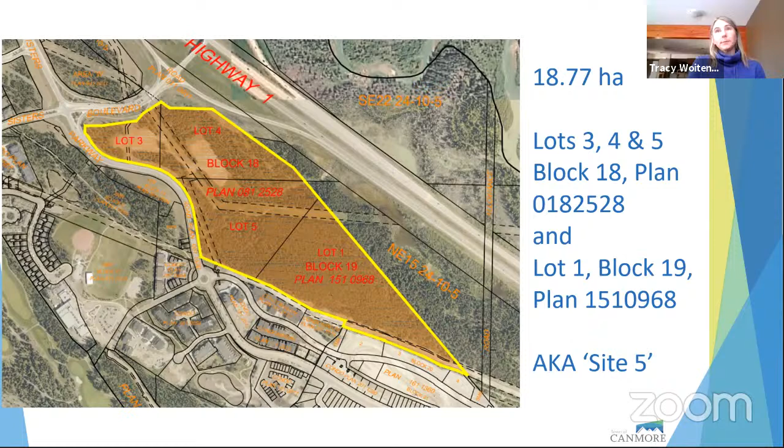So the subdivision proposal is to create 12 commercial lots, 1 medium density residential lot, which is a block for future subdivision, 2 environmental reserve lots, 3 municipal reserves, and 2 public utility lots. It also creates 1 road. Therefore, under our subdivision bylaw, it must be decided upon by the primary subdivision authority, which is yourselves. This image shows the subdivision concept: the overall layout of the various lots, potential building locations, the stormwater pond, municipal reserve, and the residential lot. But this is just a concept map.

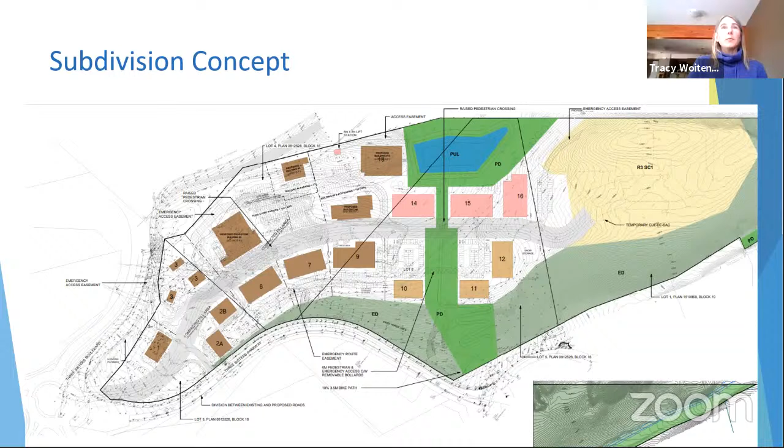The actual tentative plan of subdivision that has been put forward is shown here. This is a little more complex to read, just the black and white lines. But I'm going to get my highlighter going. There we go. So you can see Three Sisters Boulevard here, the existing Three Sisters Parkway here, and this is the new proposed road, the 12 commercial lots, and the residential lot.

So the administration recommendation today is that the application be approved, subject to numerous conditions. You'll see later we have 42 proposed conditions. These address issues that we feel were not resolved satisfactorily by the applicant during our application review and subdivision process, and this allows the recommendation to come forward for approval. It provides clarity of the requirements for the applicant, and provides the town with adequate protections during the detailed design and development processes.

So there's a number of things that the subdivision authority is required to use in making its decision under both the Municipal Government Act and the Subdivision and Development Regulation. The first one is topography. You can see here, this is the site. It is a very treed site. There is some existing development on the site, mostly removal of trees, as well as some stockpiling of the soils. There is a current development permit for stockpile management.

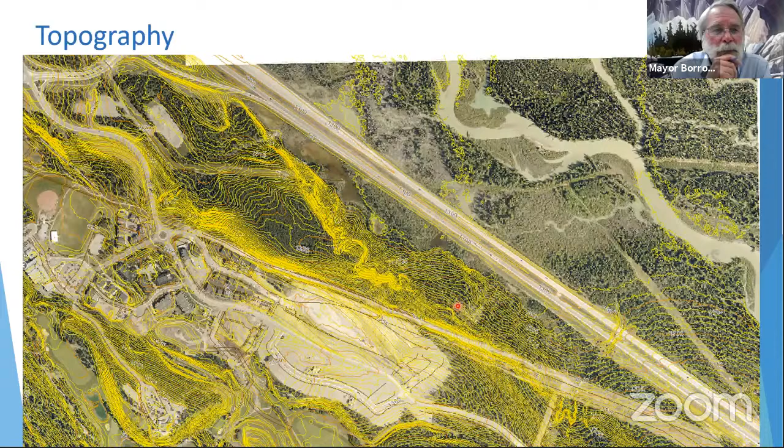Sorry, can I interrupt? Yes. There was a slide that just flashed by. Could you go back to that for a second? This is the previous slide, topography, with all the contours. Yeah, we don't see that right now. Oh, okay. The slide I see is soils. Yes. So these slides are large. So there was that one. I think, yeah. Great, thank you. Okay, my apologies. It might be skipping around because it is so large. I apologize.

So the next consideration was soils. And there's a number of recommendations in the 2 reports for site development that are to be considered for the detailed design of the subdivision and in infrastructure design. And these things are such as grading, fills, foundations, and retaining walls. And there's a condition in the Schedule A which reflects using these recommendations in the design.

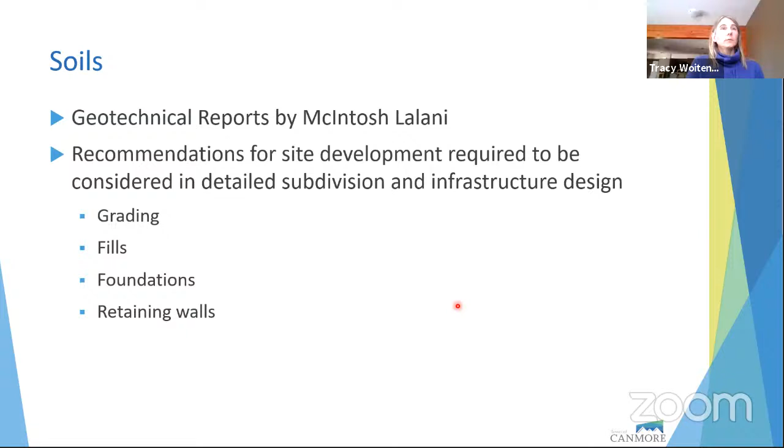The next item to consider is stormwater collection. Do you see the stormwater slide? Has it come up yet? Just the words. Is there a visual? No, just the words. Yeah, we see that.

Okay, great, thank you. So there was a staged master drainage plan, which was prepared by Stantec. This is also in your attachments. So the proposal is that stormwater is collected on sites, and then it's discharged into a collection system. And then the final destination would be a stormwater pond. Then after the stormwater pond, it is released into the Alberta Transportation right-of-way.

Through the design review, administration is recommending that the design is required to be modified so that there are no private storm mains, and that the design accommodates stormwater to be collected on the sites and then directed immediately into the public system, rather than the private storm mains collecting through individual lots. They traverse through lots before hitting the private or the public system.

We also require there to be a clear recommendation for the storm pond design. We did receive a number of recommendations, but there was not one chosen in the design. Through the detailed design, we need to know what the clear recommendation is.

And I will discuss this a little bit later too, but one of the requirements we have made for municipal reserve is for a dog park facility. And we have not agreed with the location of the dog park as it is now, but there are potentially better slopes to be used inside the storm pond for the dog park, but it must be shown to be adequate for both a stormwater management pond as well as the dog park.

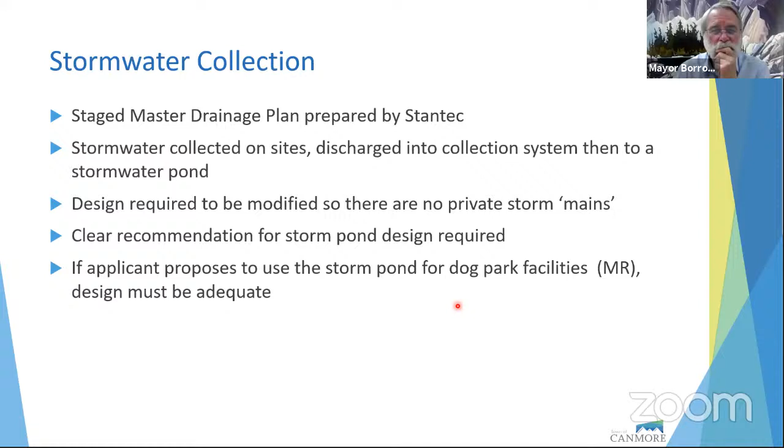The next consideration is flooding, and there is no valley bottom flood hazard. The geotechnical report did not identify any groundwater concerns. However, steep creeks is a consideration here, and this lot is located at the toe of the Three Sisters Creek Steep Creek Hazard Zone. And so we have a condition of subdivision that the grading takes into consideration any steep creek hazard or risk mitigation.

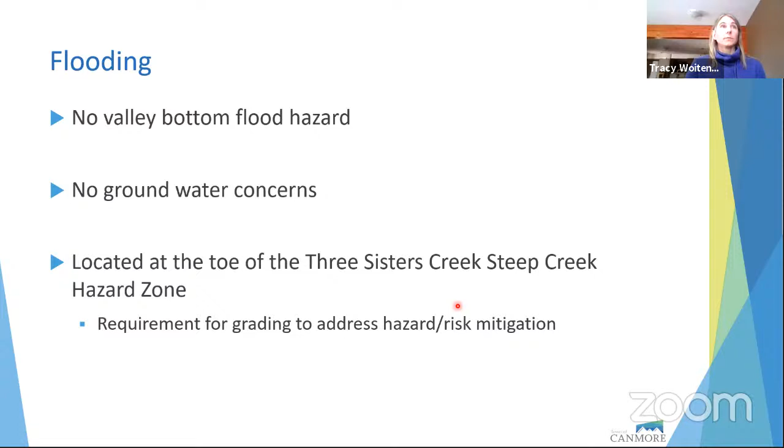Concern of this area, we did get 2 mining impact reports and certificates submitted. These are also in the attachments. And so the undermining concerns that we see, there's 2 reports. One is on the site itself. And so mitigations are required for both road and utility installation within the site during the subdivision process servicing. They also recommend that at later stages, certain buildings will require additional mitigation. And so that would come forward at the development permit stage.

The second report, which deals with the roundabout, identifies quite a large area of the road which would require paste backfill for this roundabout construction.

Can I just ask a question about the roundabout? Is that something that the province would have a review on as well, the paste backfill for the roundabout, or not? Yes, so under the Canmore undermining review regulation, the province takes all responsibility for the review of designs and mitigations at subdivision. So they would sign off on this proposed mitigation? That's correct. Okay.

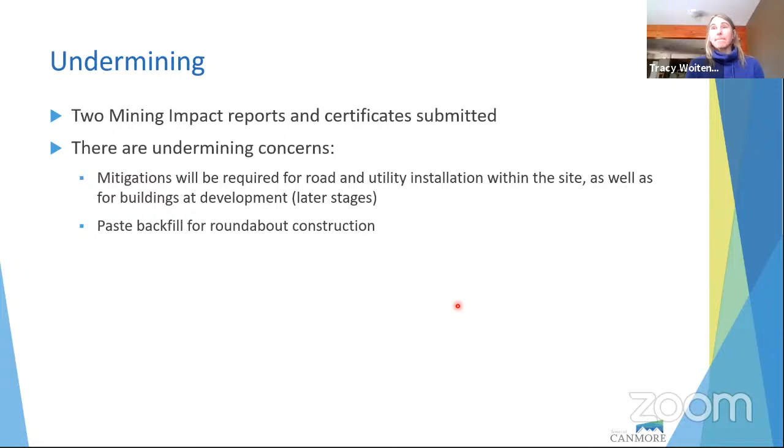Erosion is a concern on this site, and the geotechnical reports did do some slope stability analysis, and it did recommend development setbacks from the steep slopes and mitigation, such as retaining walls. Also required that restrictive covenants are registered on certain titles to maintain development setbacks and to limit further disturbance of the slopes.

Administration is also recommending that a 0.5 hectare portion of lot 18 MR be dedicated ER. This is a very steep slope. The remainder of the slope was designated ER. The slope was identified as unstable and mitigations to be done at the bottom of the slope for those developments, as well as that restrictive covenant. So we do know that from the existing geotechnical reports, we have that slope is unstable.

The one thing that the geotechnical reports did not evaluate was in the area of lot 16 MR. And I will get into that a little bit later, but it did not address the stability there or any mitigations for the existing erosion that's occurring on that site.

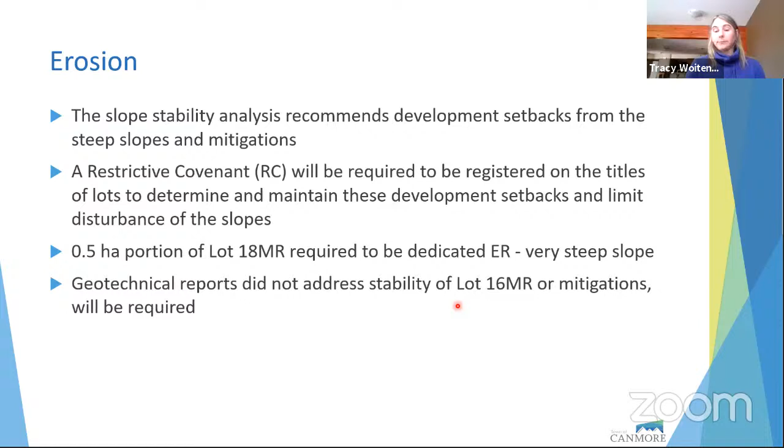We are also required at subdivision to make sure that any proposed lots have accessibility to a road. And designing access to this site was very challenging for a number of reasons. There's steep slopes, there's Alberta Transportation restrictions, as well as emergency access to the site. And so through conversations with the applicant, two unique solutions were proposed. The first one is a 5-leg turbo roundabout. And the second solution is the principal commercial street design to function as 2 public accesses. And this would be for emergency purposes.

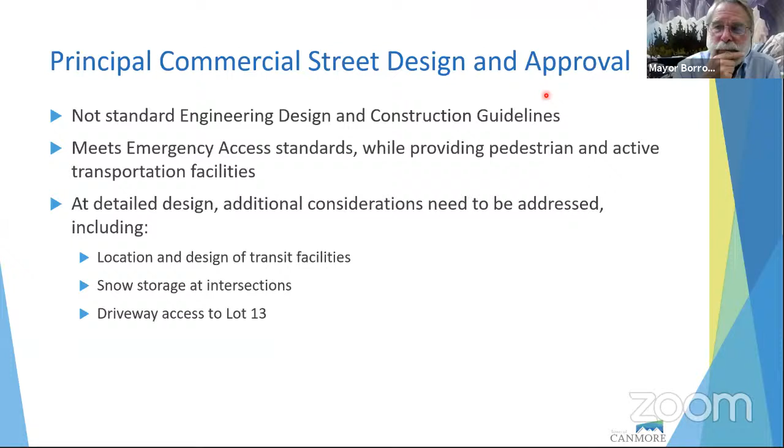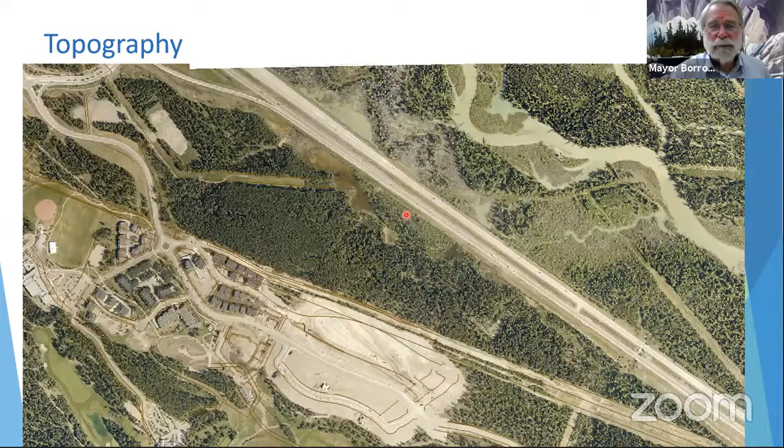Lot 13 is the, let's see if I can get back. Do you see the tentative plan of subdivision right now? No, not right now. Okay, it should catch up with me in a second here. Yeah, I see topography. It gets stuck on that photo. It's a large one. Okay, there we are in tentative plan. Yep. This is lot 13 here. Okay, thank you.

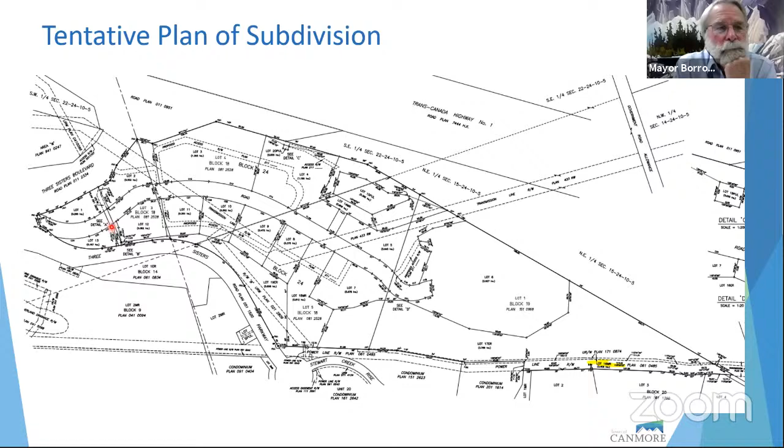The other consideration with the water system is there is a greater water looping with the larger system, and we would like to further explore this at detailed design to minimize disturbance to the steep slopes. The current location of the water line is in that proposed municipal reserve lot. We would like the applicant to also explore putting the water line under the pathway, the redesigned pathway that we are proposing or recommending.

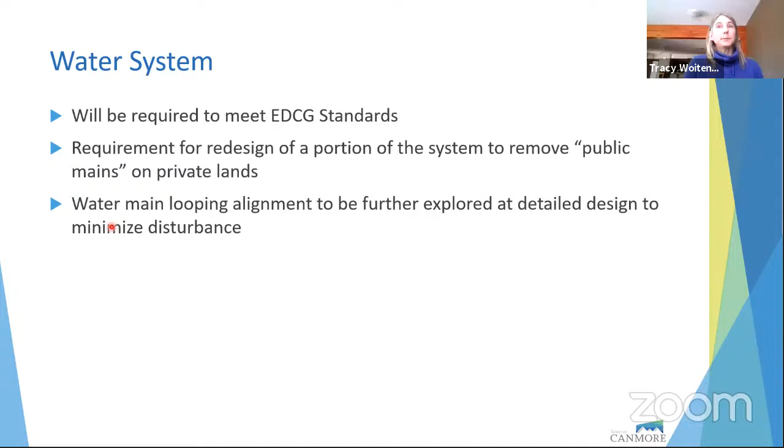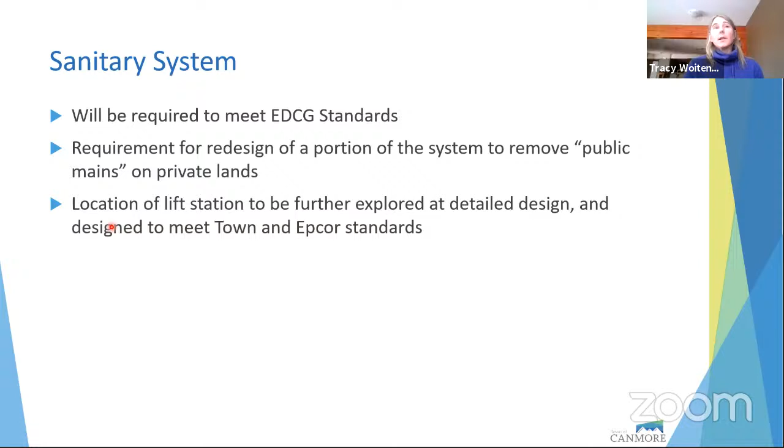Similar to the water system, the sanitary system also must meet our standards. Again, there have been some portions of the system which have been proposed to be public, but they are on private lands, and we would need that to be redesigned. Mostly that is related to the location of the lift station. And so we have a condition of approval that we would like to further explore in the detailed design the location of the lift station, as well as we'll need the design to meet town and EPCOR standards.

That's the technical considerations. There's a bunch of other considerations that the subdivision authority needs to look at when approving a subdivision, and that's consistency with our statutory plans. And so generally the subdivision is consistent with the plans. With the land use bylaw, it generally conforms, but administration recommends minor amendments to the land use bylaw, and this includes the land use district mapping.

So for example, some of the lot realignments or changes in municipal reserve and environmental reserve require changes in zoning. As well, the new commercial street design is different than what was anticipated when this land use district was created. Currently it is a 0 yard setback for the front yards, and we are recommending a minimum of 0.5 meters to 1 meter. And that would be in the TS-GD district.

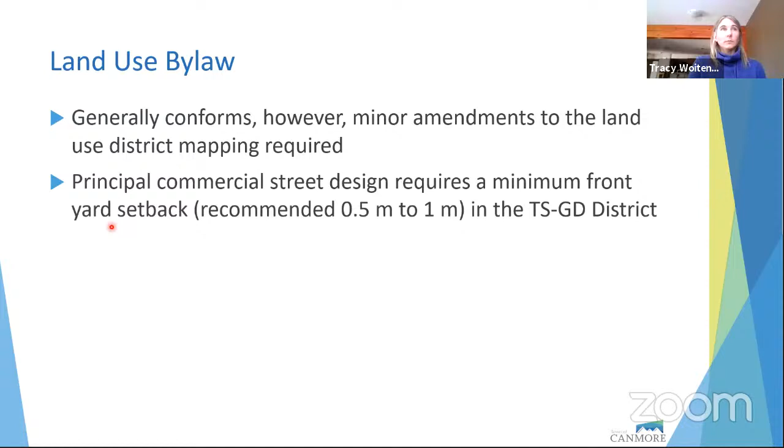The next consideration is municipal reserve contribution. The MGA allows a municipality to require 10% of developable land for municipal reserve. Developable land includes the total area of land minus any ER dedication. We can't take municipal reserve on environmental reserve, and there's quite a large area of land proposed to be environmental reserve. And so we've evaluated the municipal reserve proposal by the applicant in accordance with our various policies, including the MDP, our open spaces development guidelines, and the open spaces and trails plan.

And we are not in agreement with the lands that are proposed by the applicant for municipal reserve. Reason for this is that most of the lands proposed are very steep. And so they have greater than 33% grade, almost all of the municipal reserve. And so our administrative recommendation is to only accept different MR lands than has been proposed by the applicant.

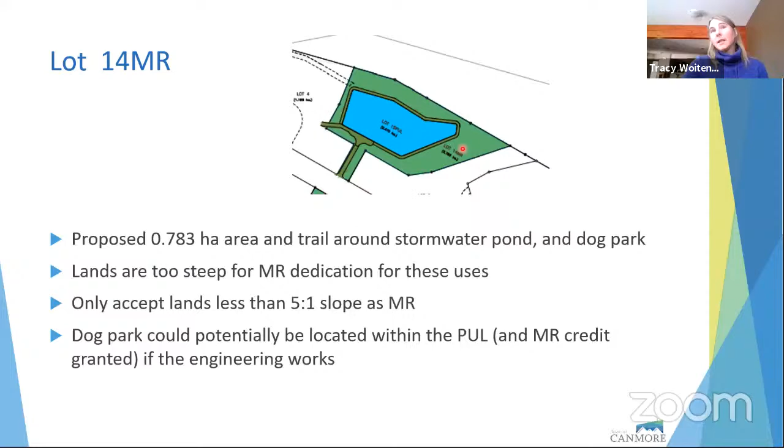So this is an overlay that staff created to show this is the landscaping plan and the grading plan that have been overlaid on top of each other. So for example, this dog park here, these slopes are 33 to 35%.

Oh, sorry, that just popped up now. Okay, thank you for letting me know. This is the dog park here. Can you move your cursor again?

Okay, yeah. Thank you. This dog park, these lands are 33 to, I think, over 35% slope, which is too steep for a dog park. As you can see, the remainder of the lands as well proposed for MR are also at a minimum of 33%. So we have proposed a stormwater management pond. These inside slopes are less, they are 5-to-1. If the dog park could be accommodated within these less steep slopes, if that works for the engineering design, as well as accommodating a dog park use, we would potentially give some credit for municipal reserve in the PUL lands.

And if it went that way, it's hard to visualize, you know, in the real world, what that dog park would look like if it was where your cursor is now. I mean, is it wide? Does it compare to one of the neighborhood off-leash dog parks, for instance, that we built? It would meet our requirements. So we have asked the applicant to provide a 0.4 hectare dog park, which is our smallest size of a dog park that we have. And so it would be comparable in size.

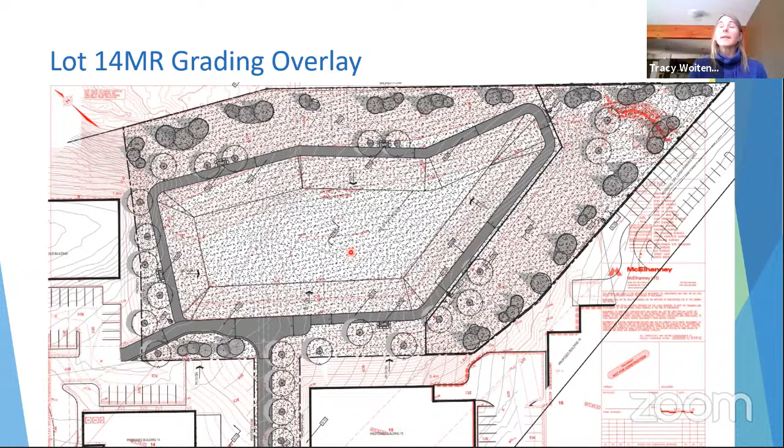If the dog park fence, for example, were behind the trail. Because this area, the dog park wouldn't be designed as a regional dog park, there's no parking here. We wouldn't anticipate people to be driving from other communities. This would be people walking from either the residential area or the commercial area to walk their dogs. So it would be a smaller one. Yeah, thank you.

The second MR proposed is lot 16, and this is the linear trail. So this trail is already existing. It was constructed, I think, with Stewart Creek Phase 3, and they proposed 0.406 hectares in this. However, administration notes that these lands are steeply sloping above and below the trail. The slopes below the trail are eroding and are potentially unstable. These slopes were not assessed in the geotechnical reports that were provided.

And so our conditions of approval is for a recommendation for evaluation by a geotechnical engineer. And so any mitigations to stabilize the slope must be undertaken, as well as potential realignment of that municipal reserve or environmental reserve boundary to accommodate any of those unstable slopes.

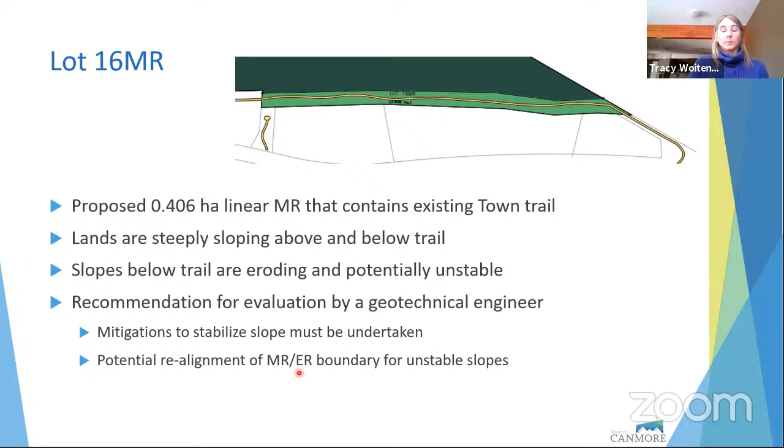The last MR proposed was lot 18 MR. And as I mentioned earlier, this contains some of those steep unstable lands. And so administration is recommending that this area, which is 0.5 hectare, be included in the ER dedication. So you'll notice that this land here is ER, as well as this ER. So this is that same steep slope. Actually, a lot of the land in here is almost steeper than the other environmental reserve lands.

And so administration recommends that the remaining 0.32 hectares of land may be accepted for appropriate park uses. They did include a residential playground in this area. Administration's recommendation throughout the review process, to meet our policy set for playgrounds, is that a playground isn't located in the commercial area, that it's actually located in the residential lot.

And so we have come up with a list of required MR to be designated as part of this application approval. That would be that in lot 6, there's a deferred reserve caveat registered on the title, and that would accommodate a future sub-neighborhood playground. And that would be 0.2 hectares. And this is in accordance with town policy.

We would accept lot 14 MR for the pond trail, because it is flat and it is a trail, and any other areas which are usable for MR purposes, including any slopes less than 5:1. So approximately by calculation, that's about 0.196 hectares. If the dog park could be included in this area, and the engineering works out, it might go up to 0.32 hectares.

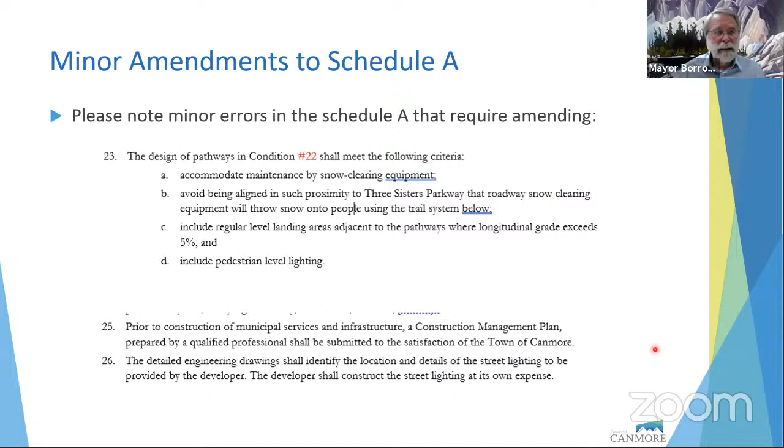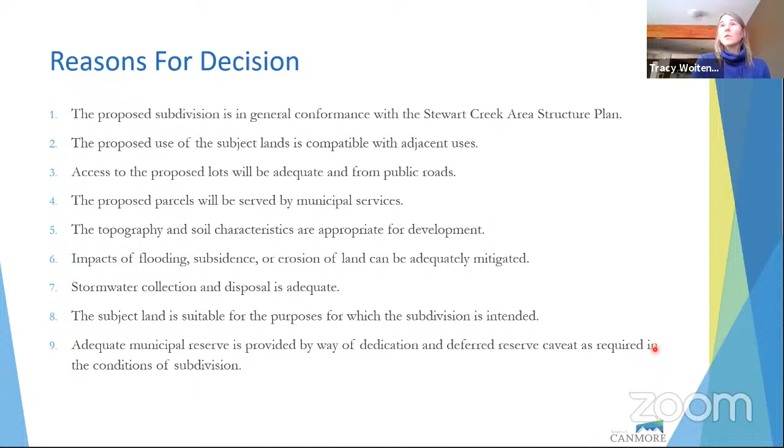And there are a number of reasons for our decision that we have offered to the subdivision authority. So you could also amend the reasons for these decisions should you feel it necessary. That's the end of my presentation. Any questions? I have a few. So I'm just going to start at the beginning, and the other two members of the authority can jump in at any time, of course. Looking at item C, stormwater collection and disposal.

The second paragraph: stormwater runoff from each site will be collected and treated by private means prior to discharge to the public storm main. So I'm just curious how the runoff is treated. What's that process? Brian, may I please ask you to respond to that question? Thank you. I'd be happy to answer that question.

So first and foremost, I should mention that there is a large oil grit separator proposed immediately upstream of the stormwater management pond. So the primary function of removing sediment, hydrocarbons and metals from stormwater will be accomplished by that oil grit separator, which will be owned and maintained by the town. Sorry, you're a little garbled. What are you calling that? It's called an oil and grit separator.

Essentially, it's a large catch basin, if you will, that moves the stormwater through a weir system and slow moving water. It's able to separate out hydrocarbons and dirt and debris. It's something that's used widely throughout Canmore and in all municipalities in Canada. So there will be a rather large one just by the stormwater management pond that will be owned and maintained by the town. But in addition to that, each and every site will provide some level of stormwater quality treatment before they discharge to the town system.

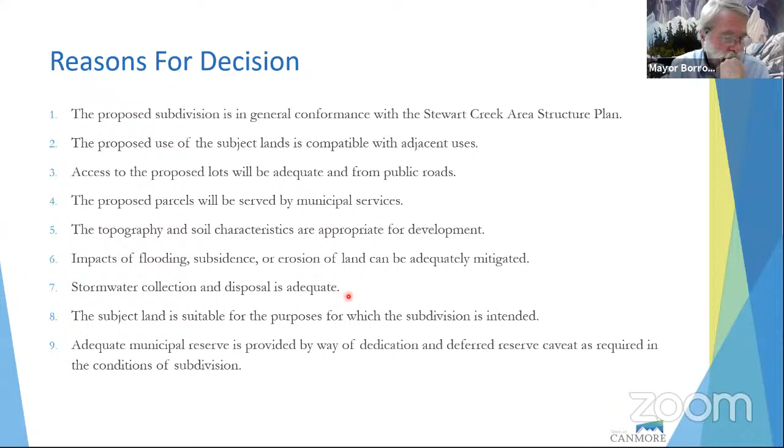is it possible for you to put the diagram of the roundabout back up? Anyone? I know there's several. I flipped there. It might just take a moment for it to come up. Sure. The one I was looking at was page 259 of the full package, but can you zoom in on that at all? On the roundabout part? Just trying to imagine myself. I don't think I can zoom in on this presentation.

So this will do. So if I'm driving into town off the Trans-Canada, then I have a clear option to turn right going towards town on the Parkway. If I want to go around to the other leg of the Parkway, I would come onto the roundabout and would I stay in the outside lane or get into the inside lane and then go back to the outside lane? How do these turbo roundabouts work in that sense?

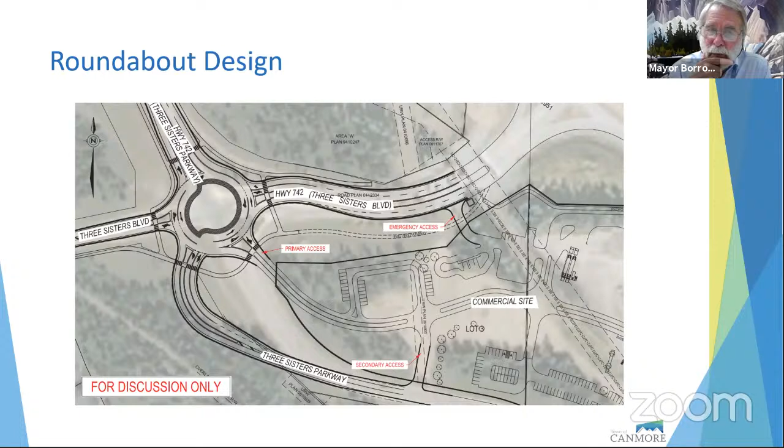I had a question in the written report that I think you covered for me, but I'll bring it up in any case. So page 12 of your report, you're talking about trails and pedestrian connections, and your recommendation is the pathway that was shown in yellow and the one in orange not be constructed. If I understand what you were saying, it's really because of the steepness of the land. Is that really the primary factor?

There is a number of considerations, but yes, the steepness of the grades. Claire can speak more to our evaluation of the proposed grades, for example, of the yellow pathway. And a bunch of that comes down to operations and maintenance concerns. So Jordy is not here today, but Claire can maybe speak to the operational concern. Claire? Yeah, that'd be great. Thank you.

Just unmuting here. Yeah, grading was certainly a significant factor in terms of looking at the yellow alignment and the navy blue alignment. So looking at maintaining grades that our operators are able to snow clear in the winter so that we've got year-round access to the site, and as well trying to keep those grades as low as possible so that it's accessible and usable by people as well. Fewer switchbacks on the blue alignment too, and it ties in well to the central part of the spine road and uses some of the existing alignment that's had trees removed already. Great, thank you.

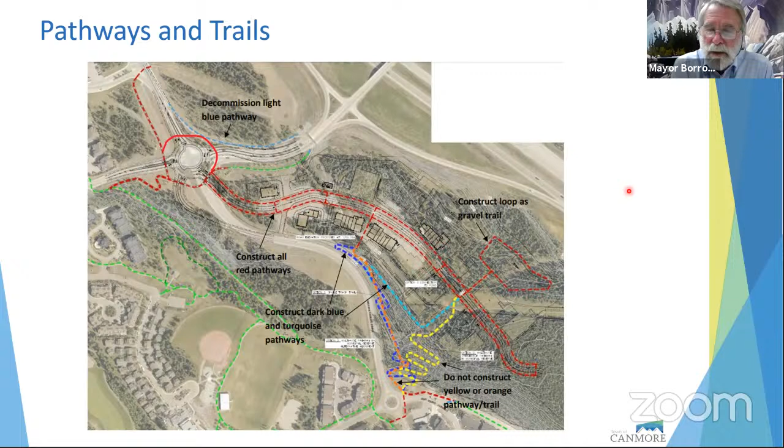Moving on to the Schedule A. So looking at the fourth condition in Schedule A, prior to submitting detailed design, the developer shall prepare and have approved a transportation impact assessment, et cetera, et cetera. So how is that different from the TIA that is shown in attachment 11? Tracy, can you respond to that, please?

Thank you. Yes, and sorry, attachment 11 is the site-specific TIA. So this would require some modifications to some of the assumptions around land use that were used as inputs for that TIA, but generally it will cover the same area. It's an update really to the background volumes that are assumed along the Three Sisters Parkway for vehicle trips. So is it something that just puts finer detail on the TIA that was included as part of the application? It just brings it into line with the currently approved land uses in the surrounding areas. So it would be the same level of detail as the TIA, but just a change to the inputs in what was submitted. Okay, thank you.

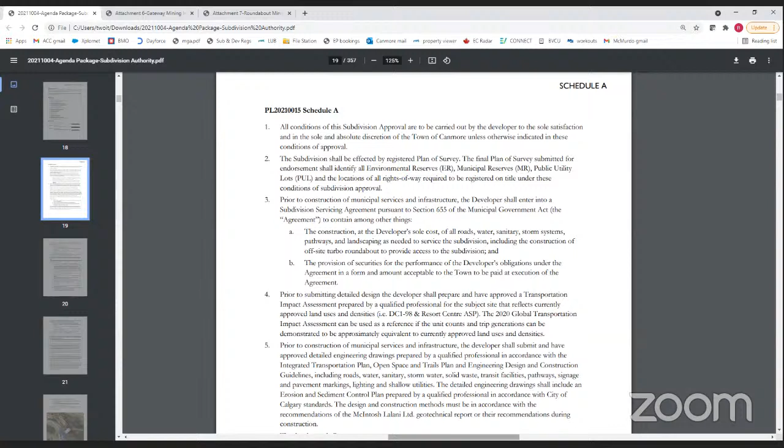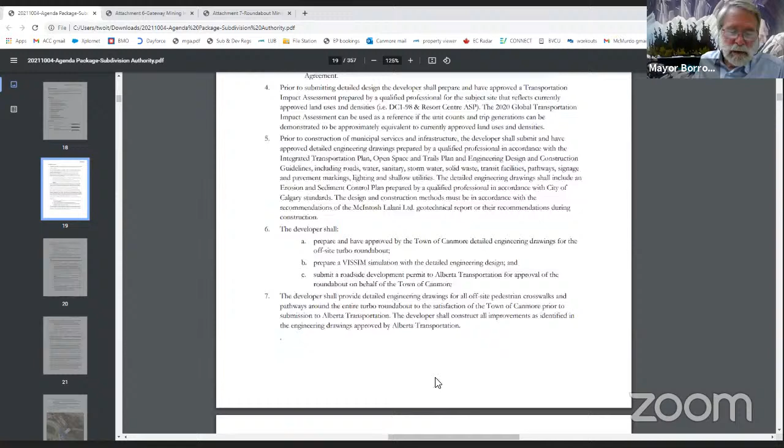In condition number 10B, notice the number of driveways onto the principal commercial street must be minimized to reduce conflict points. And what's the standard that would be applied to that?

Our EDCG provides some guidance in terms of access design. Columbola Drive is a collector roadway, and we've also identified active transportation facilities along both sides of the road to support high volumes of people walking and cycling. So speaking at a general level, it would be to try and reduce the number of conflict points where you have vehicles entering and exiting and crossing pathways.

So at this stage at subdivision, if there are opportunities for some of those to be consolidated between adjacent sites or not to provide multiple accesses where they're not required, that would be the intent of that requirement. Just as it sounded. Thank you.

And in 10D, it references a swept path analysis shall be provided. What's a swept path analysis? That would be to look at the design specifics of the roadway. So most of the vehicles that travel along the roadway are going to be passenger vehicles that don't require as much space to make turns. And the control vehicle for those roadways and accesses would be larger delivery vehicles coming in there.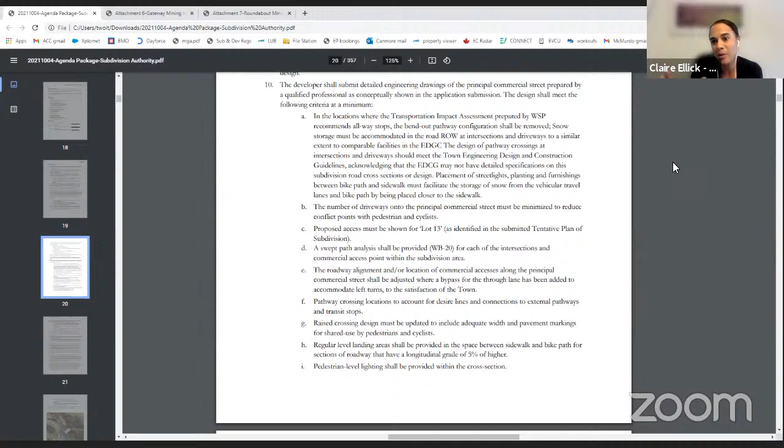So swept path analysis just shows the space that's required for those particular vehicles to make a turn and reflect that they can be accommodated through the proposed geometry. Okay, not what I thought at all. Thanks.

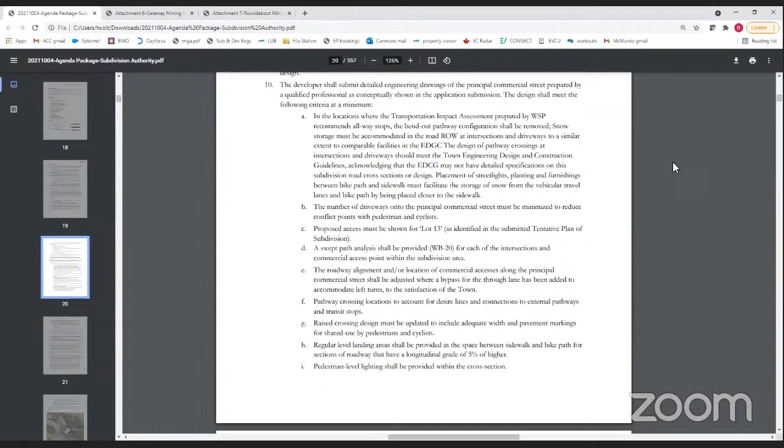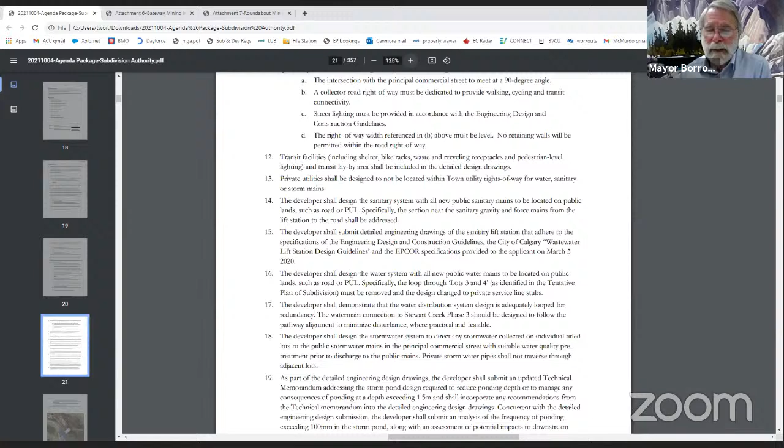There's a number of acronyms within the conditions, many of which are spelled out at one point or another. I was looking at number 14 and PUL. What's that acronym for? A PUL is a public utility lot. It typically contains utilities, underground utilities in it. Great, thank you.

And in condition number 19, it suggests that there'd be required an assessment of potential impacts to downstream water quality should the pond area be proposed for use as a dog park. I think that's pretty straightforward, but is it a concern about uncollected dog feces contaminating water, or is that what that's about? Yes, indeed, it is. We wish to assess the potential impact.

Certainly we would have the Mutt-Mitt dog bag dispensers located strategically around the site, and we would ask dog owners to collect dog feces. However, it is to be expected there would be a small amount that would enter the effluent. So the assessment would just be an assurance that downstream water quality can be ensured with that dog park function. Okay, and is that something we've done with all of the dog parks that we've approved?

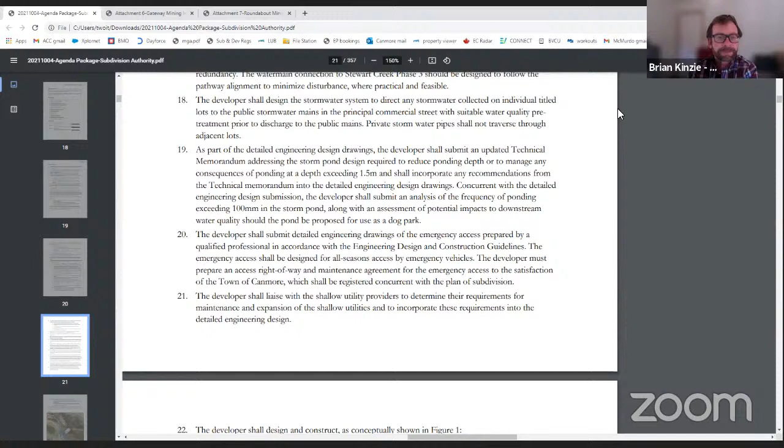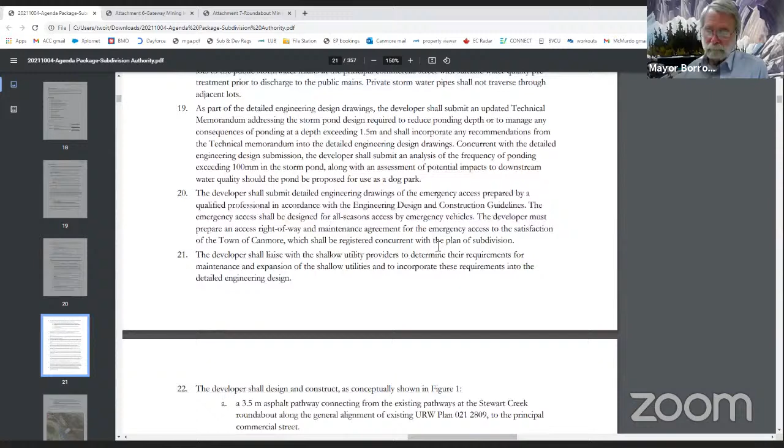And then number 20, it talks about the emergency access point. I assume, is it similar in nature to the emergency access road in Rundleview and Silvertip? Would it be designed to that kind of standard? Brian or Claire, could you please? Thanks, Brian. Sure, I can take that. Yeah, so we're talking about the emergency access that connects out to the Three Sisters Boulevard, I believe, near the interchange. Right, I don't have the map, but yeah, up to the north end of the subdivision.

Yeah, so the town of Canmore, for emergency access, we defer to the City of Calgary Fire Department access standards. So that would require a 6-meter wide paved surface capable of supporting 80,000 pounds. It would be locked off with a swing gate, and in this particular case, we don't have a visual in front of us, but there is a central median that separates the inbound and outbound lanes, and there would very likely be a gate and some changes made to that median as well to allow all turns, egress and access in case of an emergency. Great, thanks very much.

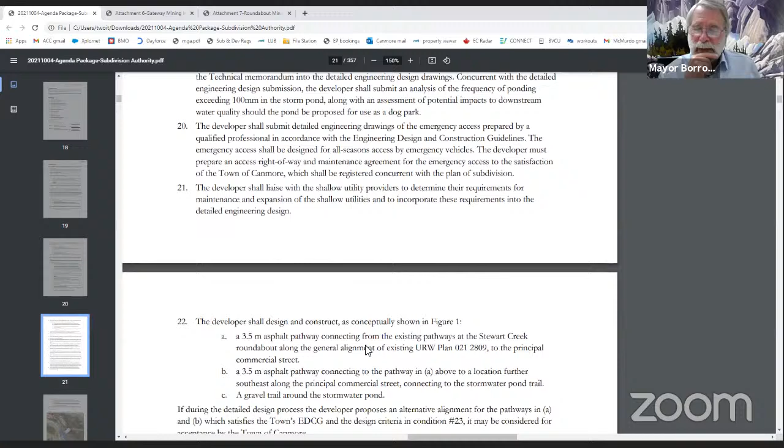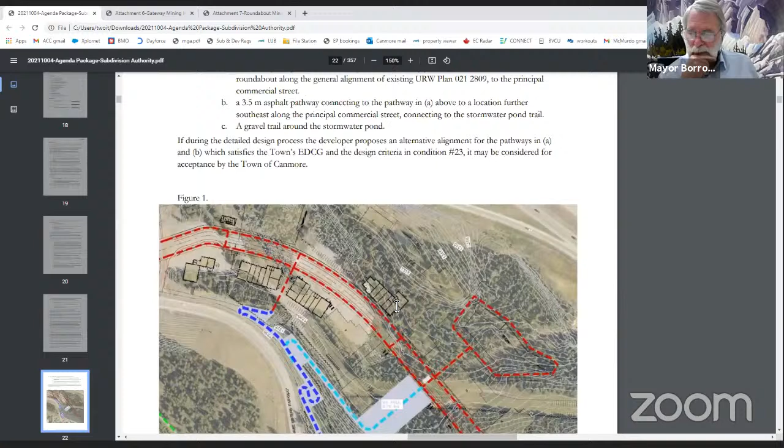So I'm curious, under condition 26, it notes that prior to the endorsement of the plan of survey, developer shall have constructed or paid to have constructed all on-site and off-site municipal services, etc. And I have a couple of questions, one of which is related to the endorsement process itself. I recall we had a discussion not that long ago in regards to Silvertip subdivision, but if Ms. Wojtanko could speak a bit more to the intent of 26 and the impact on endorsement, and also curious about what a realistic timeline might be for all of that work to be done.

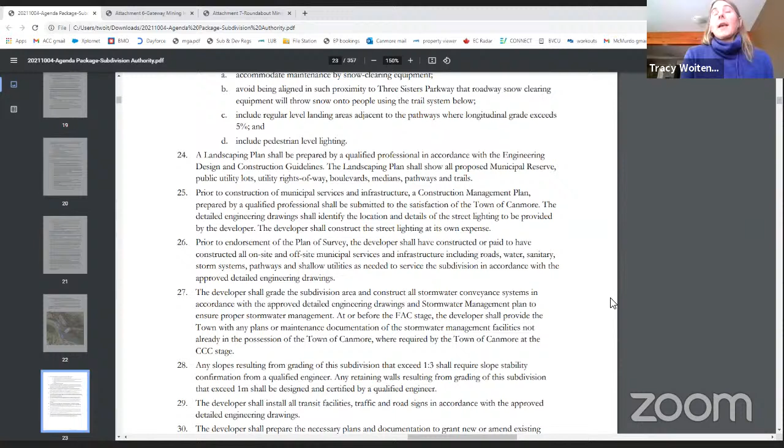So when you endorse a plan of survey, the titles to the lots are created, and then they can be sold. And so it would be the town's responsibility to ensure that those utilities and roads are provided to those lots if the developer defaults on that. So we would need to either have the money in place or to have them constructed.

Our town preference, and we have been discussing this with the applicant, is that the utilities and the road access are constructed prior to endorsement. And this would be negotiated at the signing of the development agreement. And then the remainder of the works for municipal infrastructure would be secured through performance securities at the time of subdivision, at signing of the development agreement. So timing of endorsement really depends on the speed of the applicant in doing the detailed design and commencing construction.

So maybe I'm misremembering, but wasn't there a time limit on getting to the endorsement? There is a time limit under the MGA. So for any subdivision approval, you have 1 year to take an application for endorsement. And if it is not endorsed by that time, council can give an extension to that approval. And that's not to say that endorsement needs to happen within 1 year.

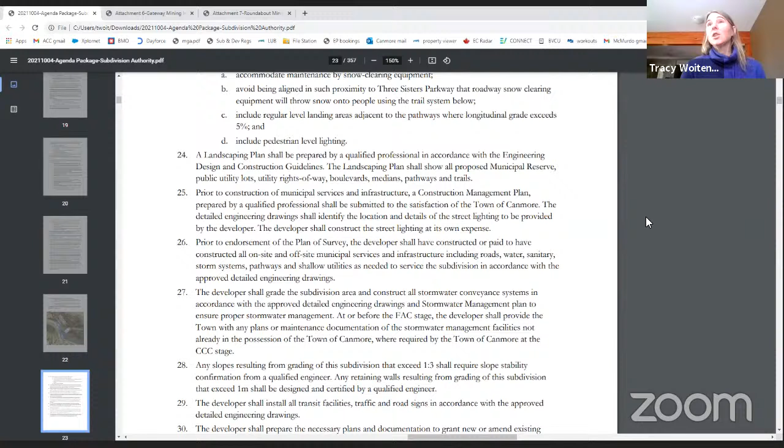That is a typical expiration period for anything within subdivisions, just to ensure that a subdivision approval doesn't go on in perpetuity. Design standards of municipalities change, zoning changes, and so that gives the municipality the ability to not renew a subdivision approval if it's no longer relevant. So it needs to be renewed at kind of annual stages. Okay, so there is that ability for the process to be extended to get the endorsement. That's correct. Thanks.

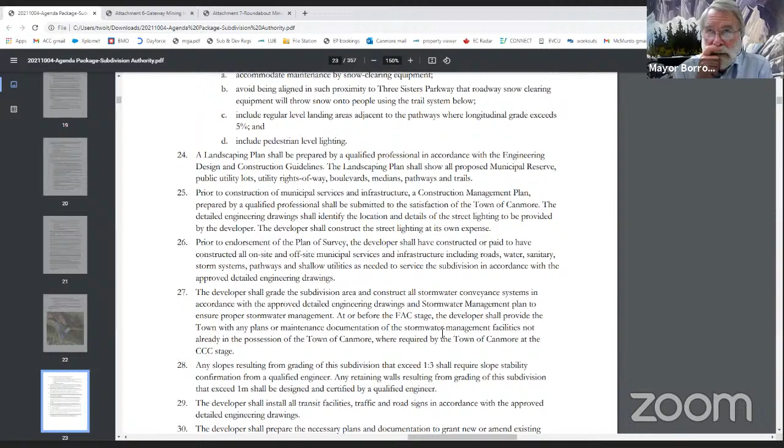And on condition number 27, grading of the subdivision area. So I'm curious what degree of grading we might see in this subdivision, and thinking back to the grading that occurred with Stewart Creek Phase 3, can you just speak to the level of grading that you might anticipate? Ryan, do you mind answering that question for me, please?

Okay. In the drawings submitted by the applicant, the preliminary engineering drawings, is what they call a grading cut fill heat map. So you'll notice, I'm just trying to pull it up now, but there are some significant cuts and fills in the order of 3 meters.

Your sound is kind of breaking up a little bit, at least for me. Apologize for that. My computer's working pretty hard here today.

There are some areas of relatively significant cut in both directions. It is worth noting, as Tracy had mentioned earlier, the town has granted a development permit for management of the existing stockpiles. You may be familiar that there are 2 rather large stockpiles there, and work is ongoing right now in terms of manipulating those so that they can be considered as structural fill. But once that work is done, there will be some other areas of fill and cut as well.

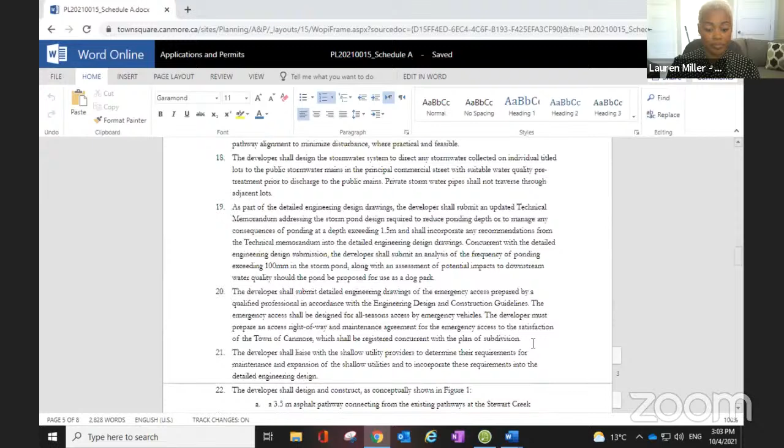So through you, Mr. Chair, just to clarify, Ms. Bravo-Stewart, can you scroll down to the list of attachments? The attachments are in the staff report, not in the Schedule A. So I would just ask for your indulgence. If we refer back to the report, what I would recommend is that the subdivision authority make a motion to amend attachment 2 and reference the updated proposed plan of subdivision that, Ms. Woitenko, you can correct me, was dated April 22nd, 2021. So that would clarify for the record, as well as anyone who's watching, that the one that was originally provided in the package was incorrect.

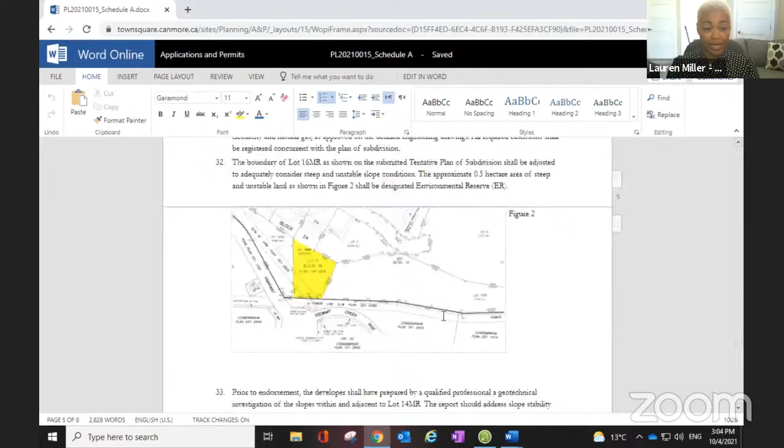A new one is being attached, and the conditions associated with the amended proposed plan of subdivision is what Ms. Bravo Stewart has on the screen. Those numbers will correspond with the amended attachment 2. Does that help? Yes, if you would have that motion prepared and ready to go. Sure. On the overhead at that time or on the share screen. That we can do. I will maybe defer to Ms. Woitenko to walk through the changes in the Schedule A, just so that everyone's clear. Does that work for you, Mr. Chair? Yeah, thank you.

So just looking back at the 3 requests from the applicant, could you address the suggested change for section 26, which is now section 27, I believe? Katy, you have control of the Schedule A, so you'll need to scroll down for me, please. Katy, I don't believe this is the version, maybe I should show it. This doesn't show the track changes that I had just made. Is track changes turned on in your version, Ms. Bravo Stewart? It was, but I can stop sharing my screen. Okay. Ms. Woitenko, if you have those handy, if you can share your screen.

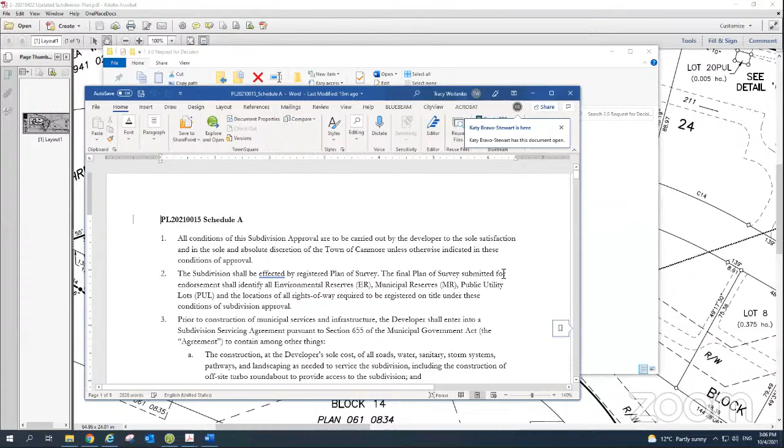Great. Can everybody see this? Yes, we can. Okay, yeah, great.

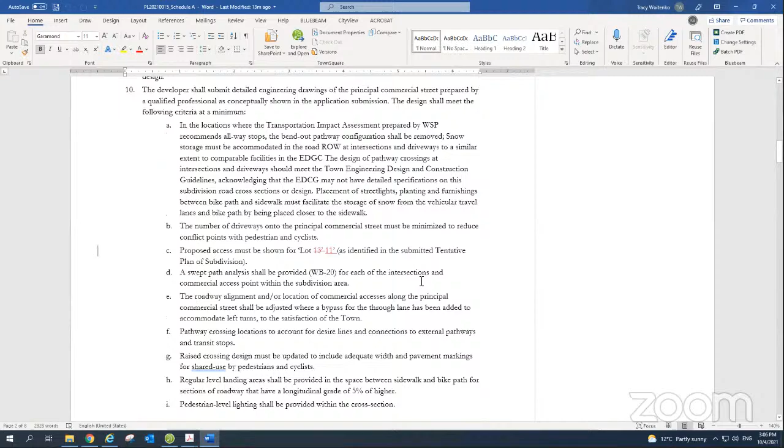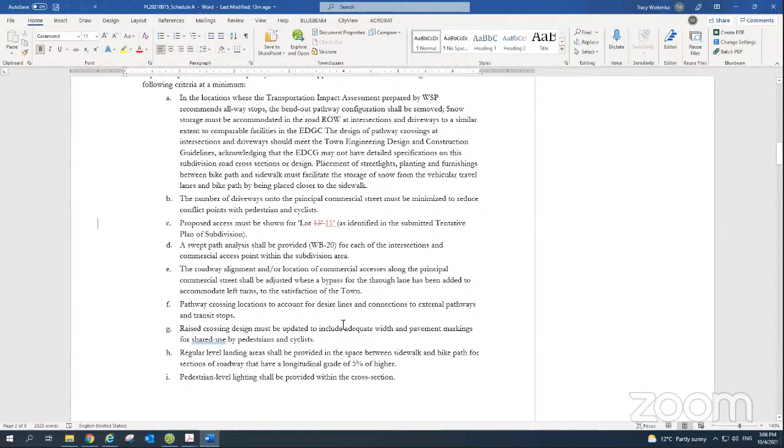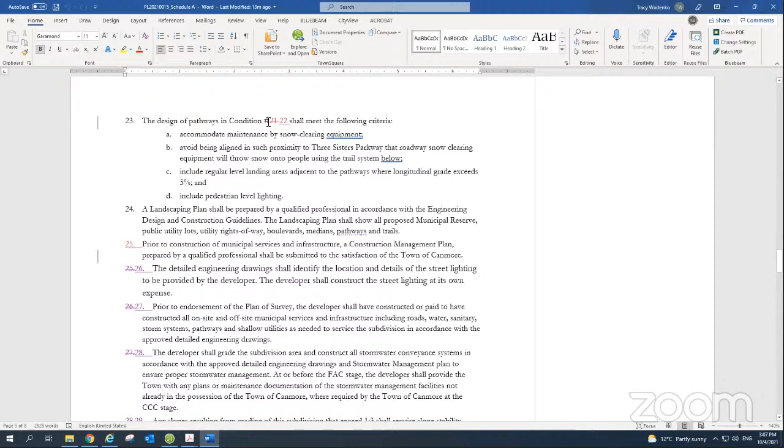So I'll run through the changes from top to bottom. So in 10C, lot 13 should reference lot 11. In number 23, that had changed to condition number 22. And then number 26 is the new number, and then everything is renumbered after that.

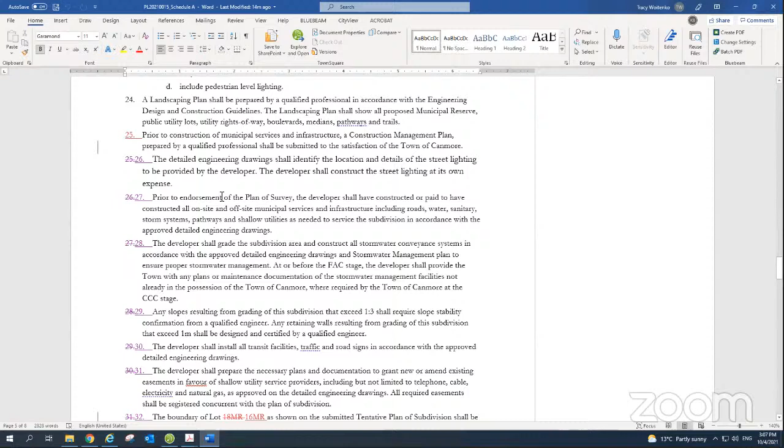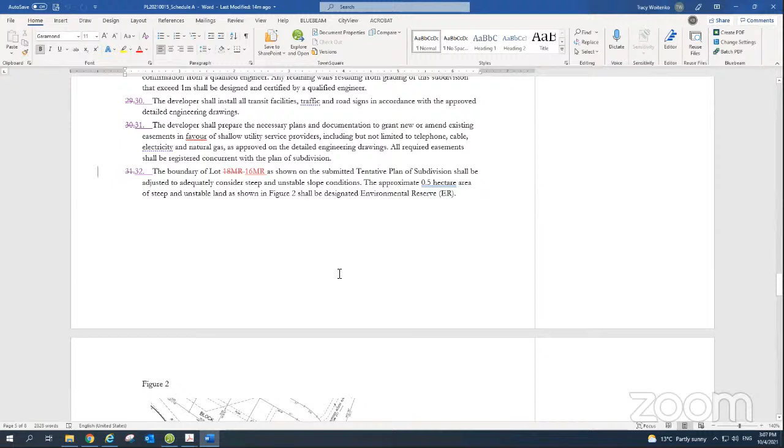So continuing on, administration, just the technical or editorial changes. In number 32, lot 18 MR should be lot 16 MR. And there's a whole bunch here in number 33 and 34. And in 39, it should also say lots 1 through 11.

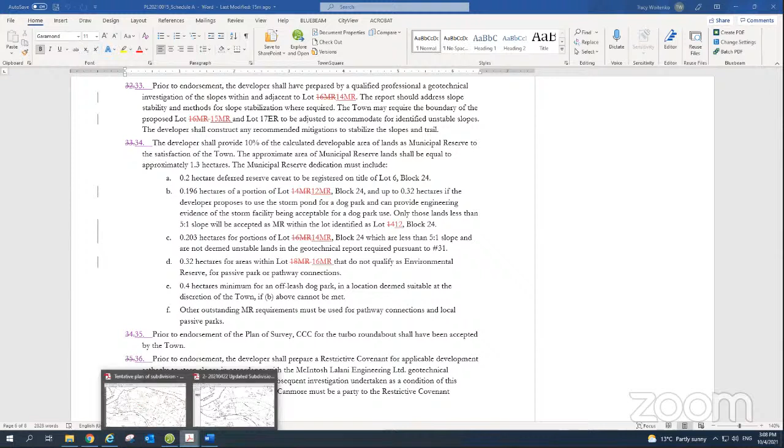Ms. Woitenko, could I ask you to show the revised, what we will be making the amended attachment 2, which is the updated plan of subdivision, just so that those watching, as well as the subdivision authority, can see the changes? Thank you. Can everybody see this plan? There are some green and some yellow lines. We see green and red. Thank you. No problem. The yellow looks red sometimes.

This is an overlay that I've created of the old plan versus the new one. The new plan shows everything in red. So in this new plan, these lot lines are no longer there. So that is different. So this is now one big lot, which is lot 9, which then caused renumbering of all the other lots above lot 9. So there were no other substantive changes to the plan. It's purely elimination of these 2 lot lines to create one bigger lot.

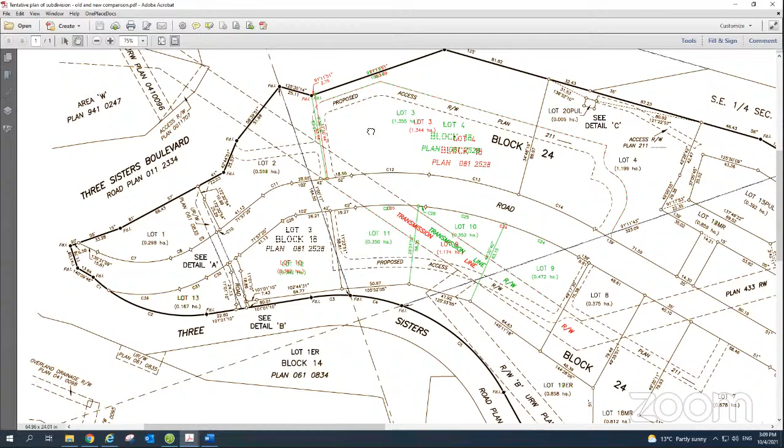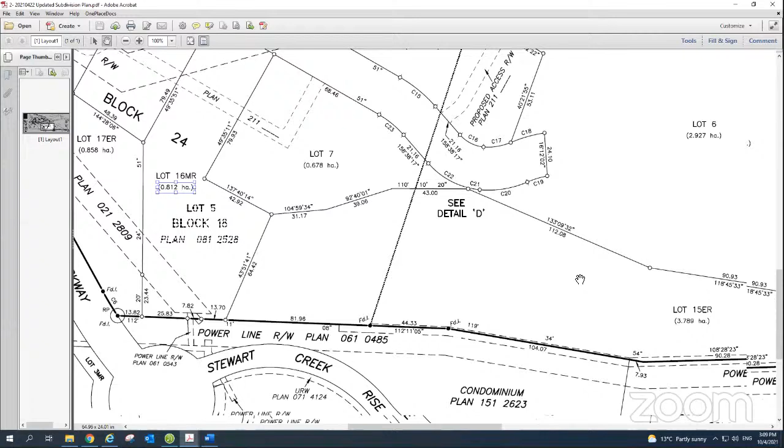Ms. Woitenko, was there a numbering change to the ER or MR lots? Yes, it's hard to see. I'll pull up the plan not in green and yellow. So this one is lot 17 ER, this is lot 16 ER, and this is lot 15 ER, which is different from before. I think you meant lot 16 MR, you said ER, or lot 16 MR and lot 17 ER. Yes. Correct, okay. Is that helpful, Mr. Chair?

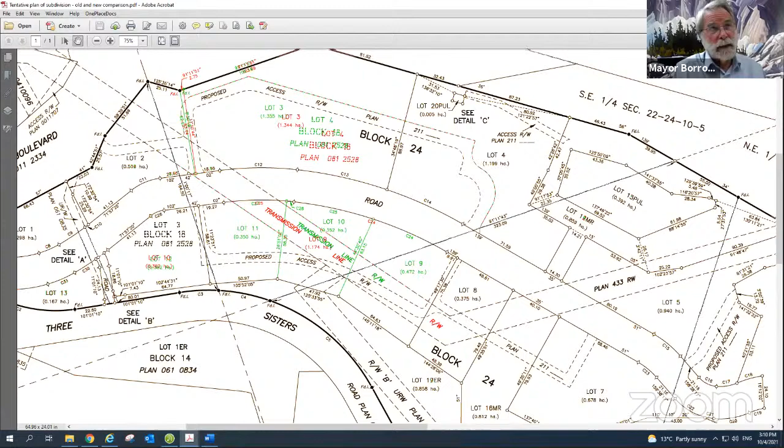Yes, I'm wondering if the change to the lot numbers has any substantive impact on the majority or the brunt of the conditions. Or I guess I'm asking, what might the impact be from this change of plan to the wording of the conditions? Yes, every change to the conditions is shown in track changes now. So what you have on the overhead are the changed conditions? Yes. Okay.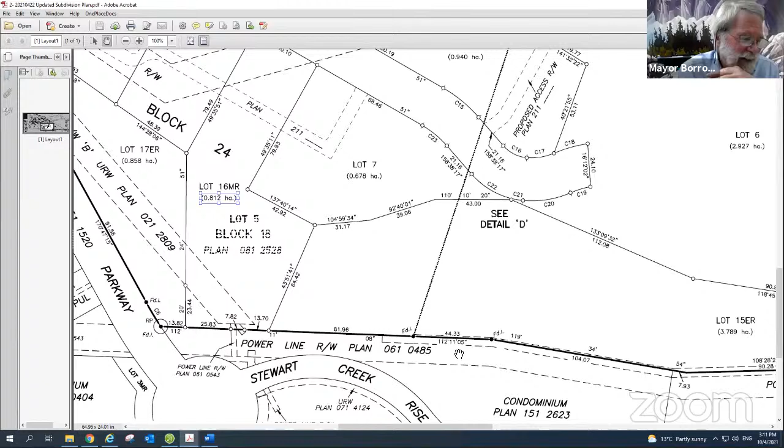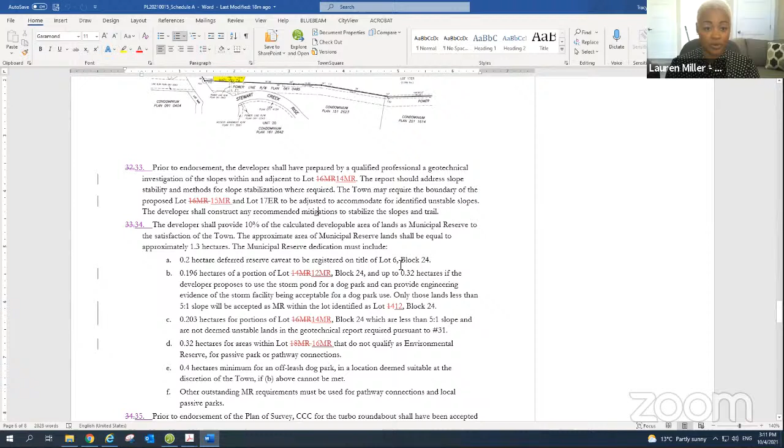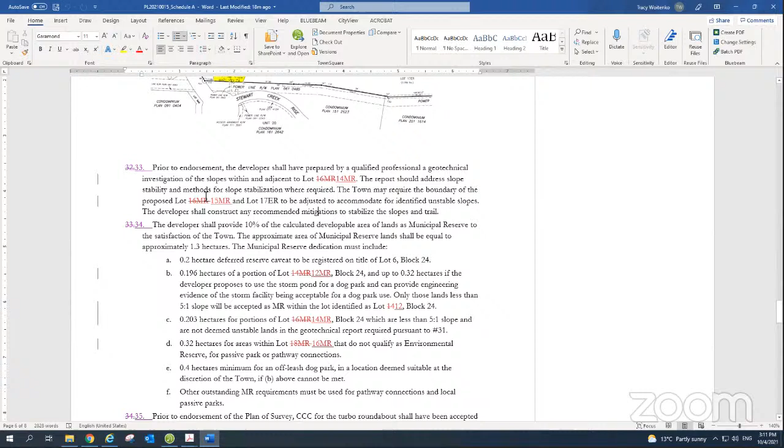I'd like to have that in front of me on my desk to review before the decision is made, just so I'm fully understanding. Is that something that can be, are you in the building? I can email these. We can coordinate that. I think Ms. Smithers is in the building, so we can coordinate that amongst administration to get that printed. Yes, I am. I wonder if this might be a good time for a break. And then Ms. Woitenko, if you can email that to me, or just put it in Teams, I'll print it off and bring it down to the Chair. Yeah, I'm certainly feeling like a break is required at this point. We need to catch up with some of these changes.

Councillor Hillstead. Just if Ms. Woitenko could go back to the slide she was just showing, there's one spot where some of the changes were from lot 16 to 14, but then one said lot 16 to 15. So I just wanted to double check that that was actually correct. So again, if I can suggest that at the break, I will bring the wording down and make sure the other 2 members of the authority have it as well. That will give administration time to double check and confirm that we've caught all the necessary edits.

Sounds good. Okay, with that, I will call a 15-minute break. So I have that we'll be starting a break at 3:12. So we can be back at, make it 3:30. Yeah, we can make it 3:30. Thank you. Thank you.